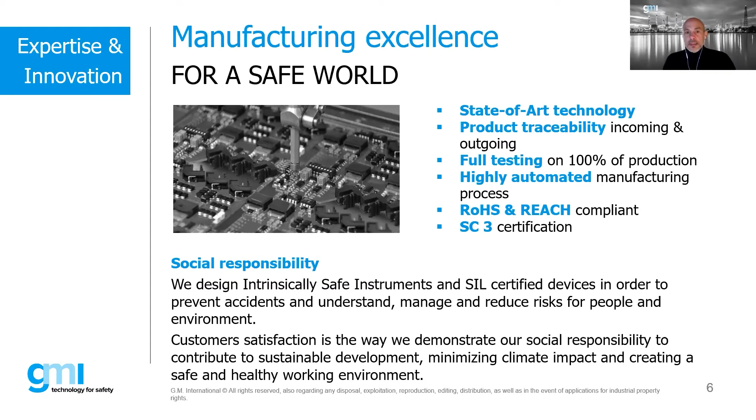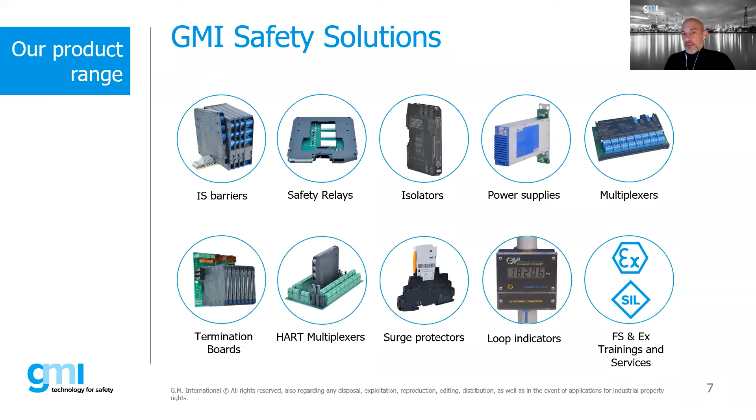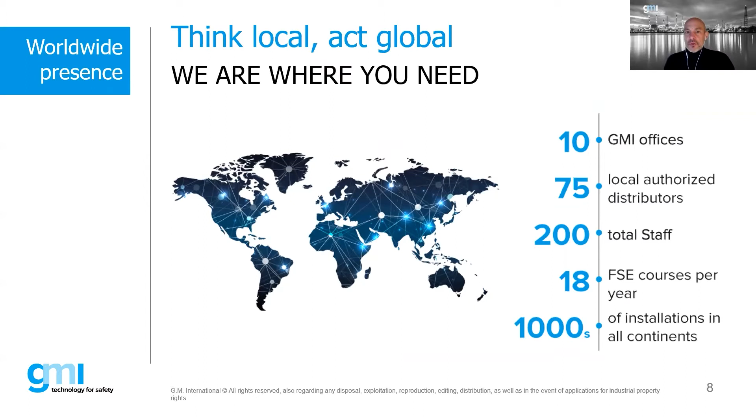So if you are interested in that, just let us know. The presence, some numbers: we have 10 offices, next will also be the 11th in Mexico, we just opened, we are opening. We also have different distributors all over the world, 200 people or less staff, and also some numbers about the functional safety courses and the number of installations.

Okay, we go quickly to the topic of today, and now I'll leave it to Bob. Thank you, Bob. All right.

Well, thank you, Andrea, and thank you very much for joining us. It is midnight here, or a little after midnight in Houston, Texas, so it's been a long day. I apologize if I slur a little bit, but I do have some coffee here to keep me going. So there's a lot of information that I'm going to cover.

And these are the biggest EX mistakes that I see. These aren't necessarily the biggest EX mistakes that you will see, but these are ones that, as an inspector, as a person who does design work in the EX world and sees a lot of EX equipment actually out in the field, these are the kinds of things that I typically find to be issues. So I wanted to bring these to the forefront. Some of these are pretty obvious, some of them maybe not so much. And again, these are only my interpretations of the things that I see.

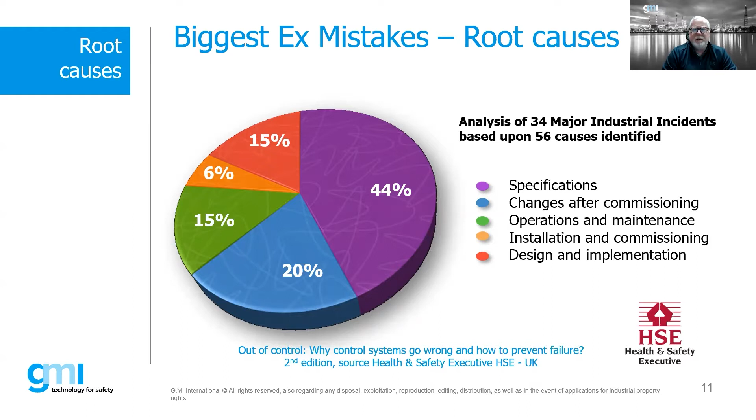So how do we define mistakes, or where can we find the answers, if you will? There's a couple key standards that I find myself using all the time, and you will find variations of these throughout the world. We follow, in effect, the IEC 60079-14 standard, which is our design guide and installation guide, and the -17 standard is our inspection and maintenance of EX equipment. So those two standards are very much where we're going to find a lot of what we need to be doing. These are very handy guides.

In Europe, we follow the EN version of these standards. Here in the United States, we've actually published now a UL version of the -17 standard. And there are variations of these standards that exist throughout the world. For example, in Australia, AS/NZS 60079-14 and -17. In many cases, these standards that are published with variations are all based upon the IEC standard, and they just get tweaked a little bit for the local markets.

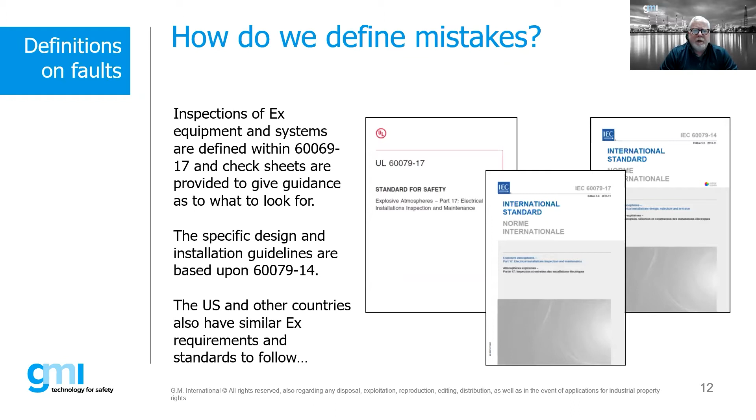So as an example, how do we define some of these mistakes? Well, the inspection tables given throughout the -17 standard give us some specific things to look for when we're actually doing inspections. I know we have a couple inspectors online here, and you guys are probably very familiar with this standard. I always tell people, even as a designer, if you're designing a skid or a system and you're going to have a third-party inspector come into your facility and look at your EX equipment, it's good for the designers and engineers to understand what the inspectors are going to be looking at.

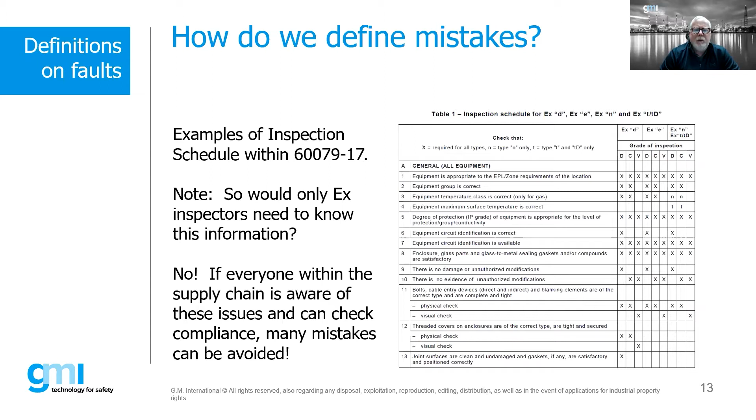So these inspection tables are critical. If you do this, when an inspector such as myself comes into your facility and starts looking at things, you'll know exactly what I'm going to be looking for. So it's important that not only inspectors should be aware of this, but really everyone within the supply chain should be familiar with these inspection tables and inspection charts.

So what's the most common mistake? This is somewhat of a generalization, and many times you think, wait a minute, this is so silly, this shouldn't happen, but it happens all the time. The equipment isn't suitable for the gas group, the temperature code, the zone, the ambient temperature, IP ratings, certification, or environmental conditions. All of these are critical things to understand before we're actually doing inspections, or making sure that whatever those client specifications are, we're selecting the appropriate product based upon the parameters we are given. Or if we're writing those specifications, we need to make sure they include this information, so our subcontractors will comply.

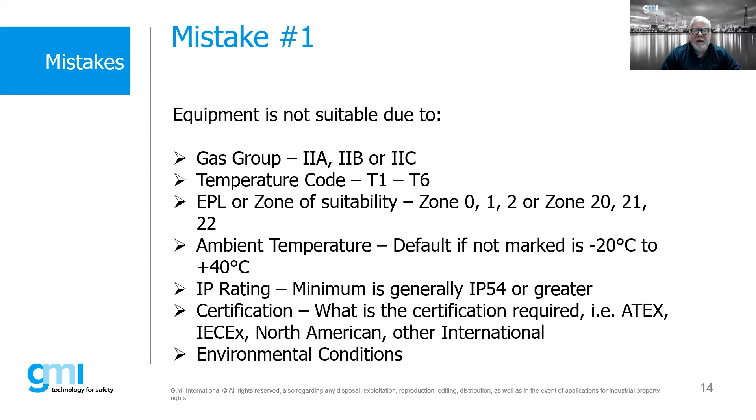It's always horrible when you have to guess and go back and forth without understanding, and maybe some of this information is left off a specification, then you have to go back and try to find out that information later on.

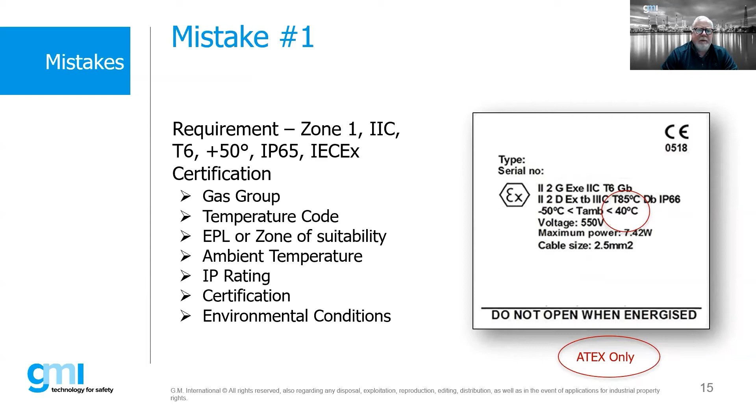Here's an example of a nameplate. The requirement is zone 1, gas group 2C, T6, plus 50 degrees C ambient, IP65, IECEx certification. We've done this in other webinars, but understanding a label is very important. Looking at that label, we can actually see that this particular product is only suitable for plus 40 degrees C. And if you notice, it does not say anything about IECEx certification. What's a giveaway telling us it's ATEX? Normally it would have an ATEX certificate number, but we also find the little EX and the CE mark telling us it's ATEX compliant. So right then and there, we discount this product based upon two factors.

Looking at this particular piece of equipment, again, similar situation. What are some of the issues? Again, ATEX only, suitable for zone 1 based upon the protection concepts, but we have some issues there. The big issue is that this was only ATEX, so therefore it would not be suitable for this particular application.

Here again, zone 1, 2C, T6. Well, there's a couple things on this one, and it spells it out fairly clearly. This product is only suitable for zone 2, and there's a dead giveaway when you see the markings under class and zones where it actually says zone 2. The protection concepts here are telling us it's zone 2 only, and the EPL is telling us GC is zone 2.

And the other thing is that it actually is a component certified product. We see that with a U. That means it's a component certified product, not a final certified product. We'll talk more about that a little bit later on. It also does not have a T code associated with this.

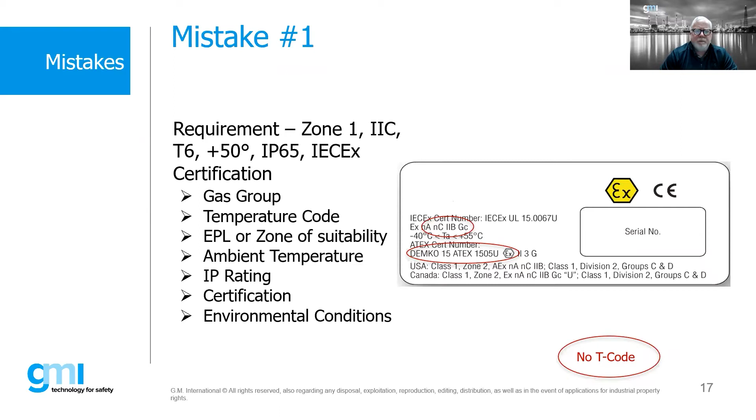Now, here's an example of another product that in this case is actually zone 1, but it's 2B plus H2, not 2C. So it meets all of those other requirements, the plus 50. It has IECEx certification, it is zone 1 rated. However, in this particular instance, it does not meet the gas group, and it does not meet that T6 qualification.

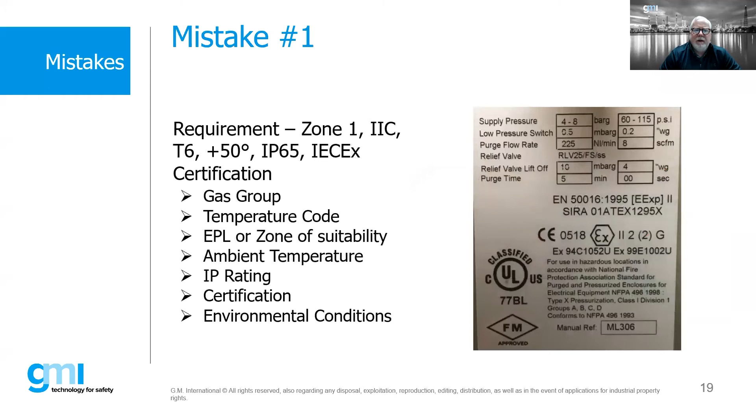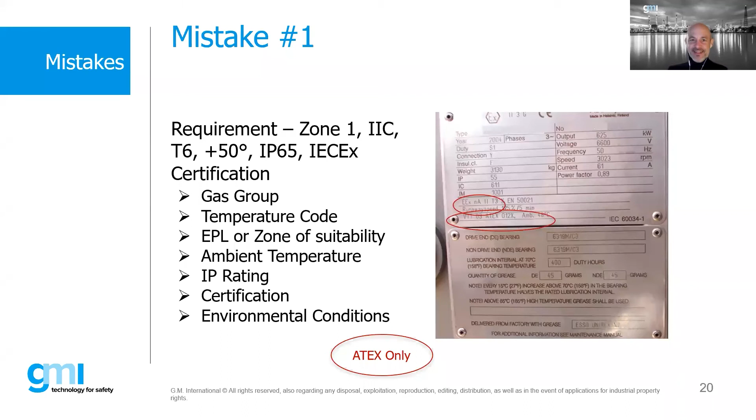I know I'm kind of telling you the same thing over and over again, but this is always a big issue, making sure that these products are suitable for the environments. So I'll skip this one and we'll move on. But here's another example, this one is zone 2 ATEX only, also doesn't meet the IP rating.

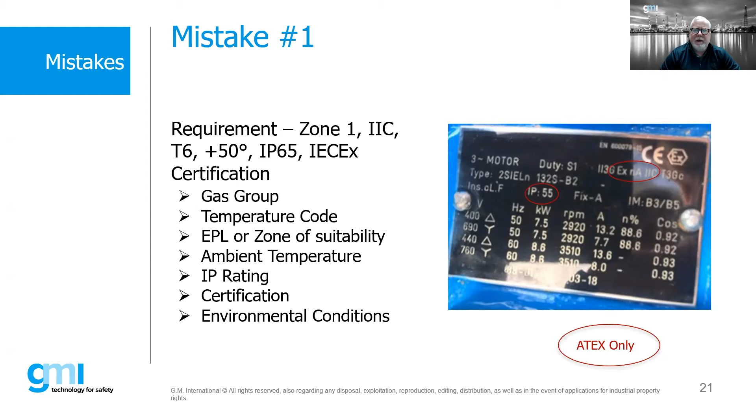So our first poll question: what is the IEC standard that provides guidance for the inspections of EX equipment and installations? So Andrea, do you recall? Yeah, already launched it. Let's see what the reaction is for the attendees.

I mentioned two particular standards at the very beginning, and I see that you're answering both of them. That's good, you guys are paying attention. But there is only one correct answer. All right, we'll give it another few seconds here. Please make your decision and let's stop it. Okay, we're gonna stop it. Now we can share the results.

Okay, yeah, so a majority of you got it right. The 17 is the standard that we follow for inspections. I did not mention what -1 was. -1 is actually the standard for flame-proof equipment, so if we're building a flame-proof box, we're building it to that particular standard. The 14 is the design and installation standard, so 14 and 17 kind of go back to back. We start off with 14, that tells us how to design it, how to install it. 17 is telling us how to inspect it. 10-1 is actually the area classification standard for gases and vapors in hazardous locations. So well done, all right, let's continue on here.

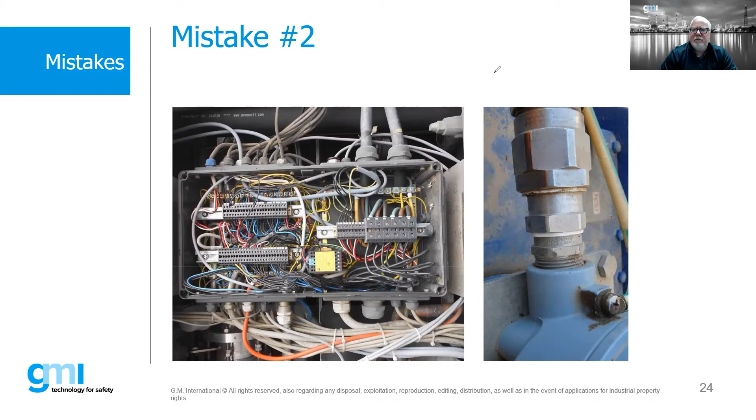On the right-hand side, what we have is a cable gland going into an adapter with an IP washer. And it looks like we've actually got a thread adapter here, and another thread adapter here. So we have two thread adapters, which is not allowed. We don't want to have multiple thread adapters.

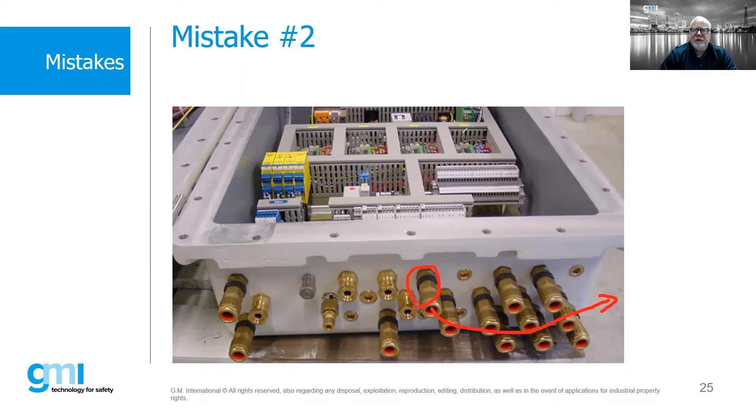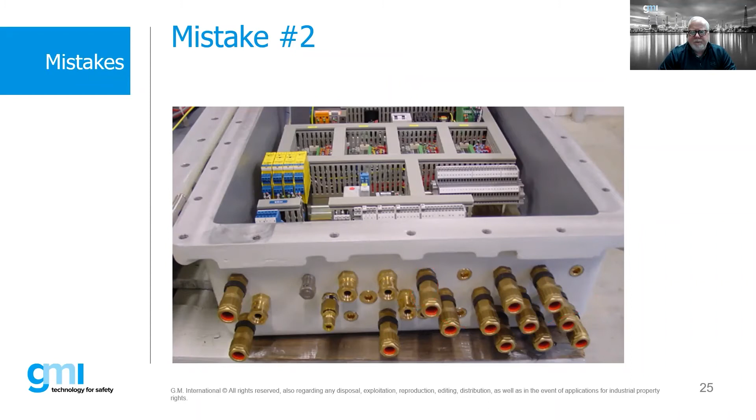If the cable lengths are less than 3 meters, meaning the cable that goes from this cable gland over to a transmitter right over here is only 2 feet away, at this point this would need to be a barrier gland. So we have to understand not only the protection concept of the glands themselves and where they're going, but also where the end device is going to be located. Because if we don't know that, we don't necessarily know whether these glands are suitable. So be aware of that.

There's our example of the Teflon tape on the left-hand side. And on the right-hand side, a combination of certified stopping plugs and non-certified traveling plugs. So the non-certified traveling plugs would definitely be an issue.

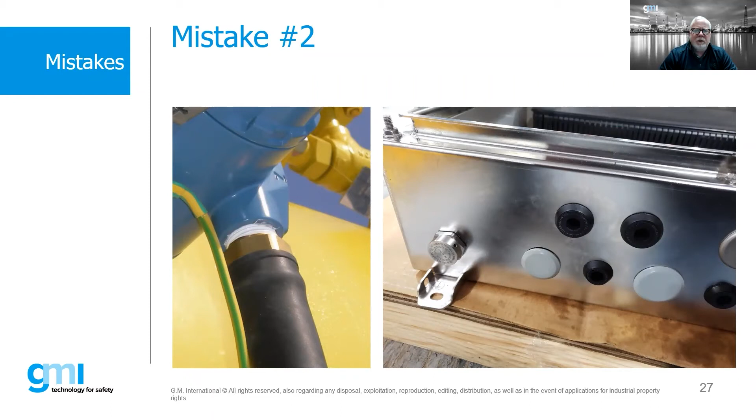So this gets into mistake number 3. Again, on glands, this is always a big issue: non-certified glands, improper installation, not using the appropriate accessories, using EXE accessories into EXD enclosures, failing to take note of

the special conditions for safe use in the installation of cable glands. All cable glands will have an X at the end of their certificate, meaning that they are designed for fixed equipment. Now, some cable glands may actually have in their special conditions for safe use, depending on the cable type, depending on the gland, an additional clamping requirement for somewhere between usually around 300 millimeters at the end of the gland.

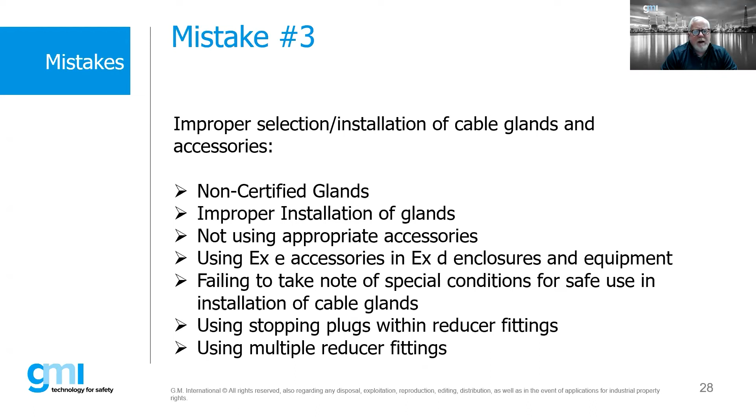If you don't pay attention to the X condition and you start doing an installation of cable glands, and an inspector like me takes a look at it and sees the X condition, they'll say, hey, you need to clamp those cables within 300 millimeters to be in compliance with the certificate. It's important to understand that using stopping plugs within a reducer fitting is not allowed, and then, of course, using multiple reducer fittings.

And then when we start opening up glands, we see that maybe they're not terminated properly, like what you see on the left-hand side. Over on the right-hand side, what you see is actually a plastic traveling plug. That's typically what is supplied by the manufacturer just as a means during the traveling of this product to keep moisture, dust, dirt out. It is not meant to be left in place. It shall be replaced with a certified stopping plug. That's a pretty common thing that we see a lot - traveling plugs left inside of EX equipment.

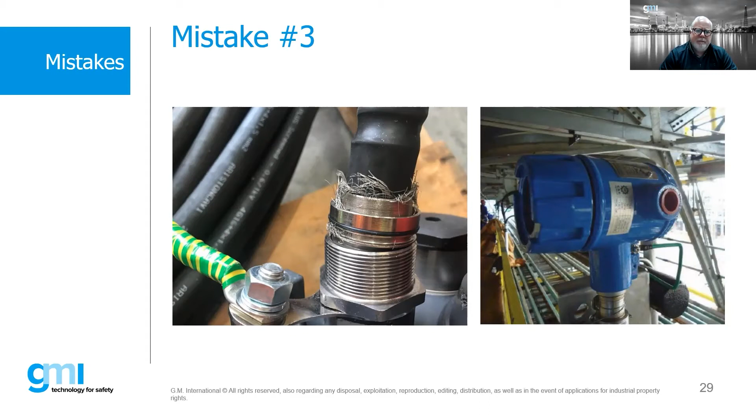Now, this is a little interesting one on the right-hand side. Just by looking at this product, this looks like a flame-proof box, and it is a flame-proof box. On the right-hand side here, what you see is actually a plastic gland. Now, if you know anything about glands, plastic glands are generally never EXD, they are only EXE. However, that box is EXD. By looking at that, you might assume this product cannot be right, that you must replace it with a certified EXD gland. However, if that transmitter was used as intrinsically safe, that may or may not be the case, so you might have to do a little more research.

On the left-hand side, what you see here is a combination of a bunch of accessories - reducers, elbows, adapters, and finally a gland. That generally would not be something that we would want to see. We'd want to minimize the amount of those types of products going into a flame-proof enclosure.

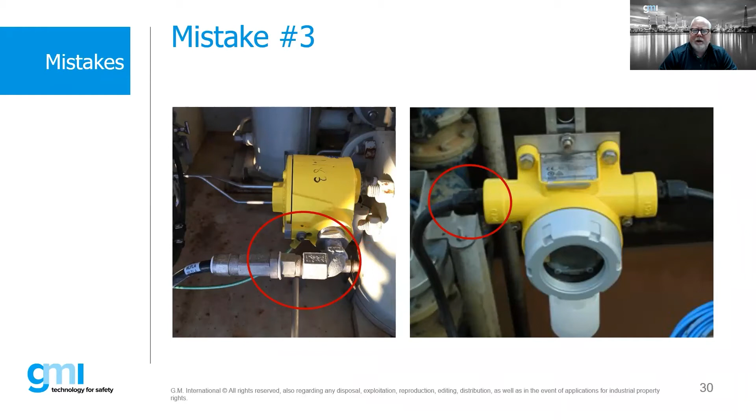Here we see some examples on the left-hand side of non-properly poured seal fittings. Seal fittings or stopper boxes are typically used as opposed to a barrier gland, where they're packed with a compound material. These were obviously not doing any good because these were cables run into entries that were not poured. That's obviously a huge issue. And then on the right-hand side, with the cable not being terminated on the back end of the gland, it pulled out, so therefore now we don't have any environmental protection.

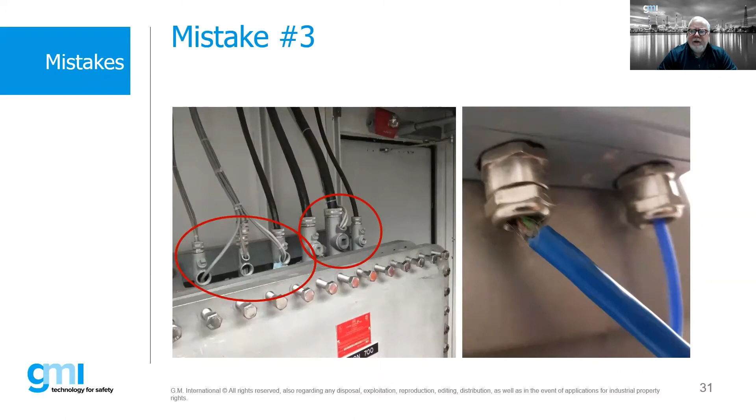Looking at these pictures here, this is where they've actually taken some compound and packed these glands after the fact from the inside of the enclosure. This is not how barrier glands shall be installed.

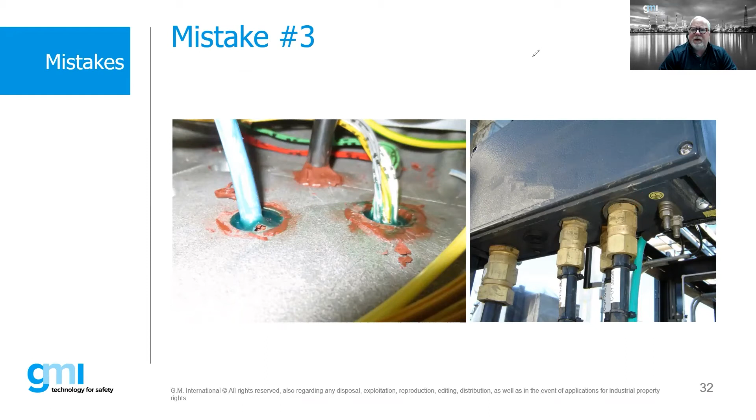What you can see very closely, if you look right here, there's actually an IP washer, but it looks like that IP washer is the wrong size. If you notice, there's a small gap there. So we basically at that point have not got appropriate protection from the gland to the enclosure. Again, that's a minor little thing, but just by looking at it you might glance at it and not see that. But that's an example of something where, if it's a requirement to maintain an IP66 rating in the environment, we've got the wrong IP washer - that's a 20-cent item that we would need to replace. We need to put a new IP washer on there. So those are little things, but those are things that inspectors are going to be looking for.

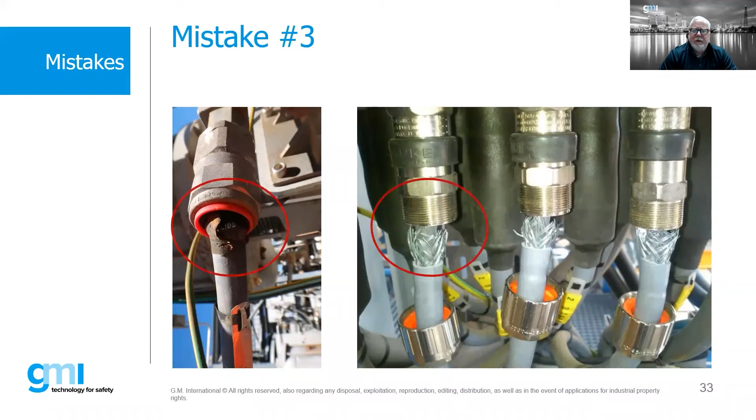And again, these are just other pictures where maybe glands are not properly terminated or they get pulled out for whatever particular reason. So it's imperative that we always look at this. Same thing with these particular glands, same issues.

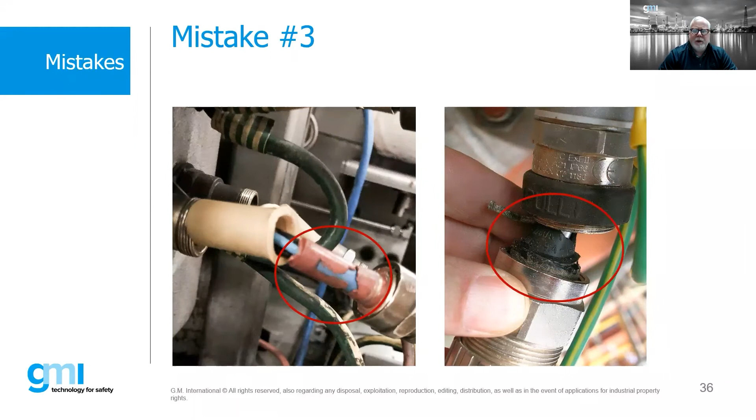Here's another example where, on the left-hand side, we're using barrier glands, but the compound wasn't properly done. On the right-hand side, we have a torn up diaphragm seal. So glands are typically a big issue with regards to inspections, making sure they're done properly.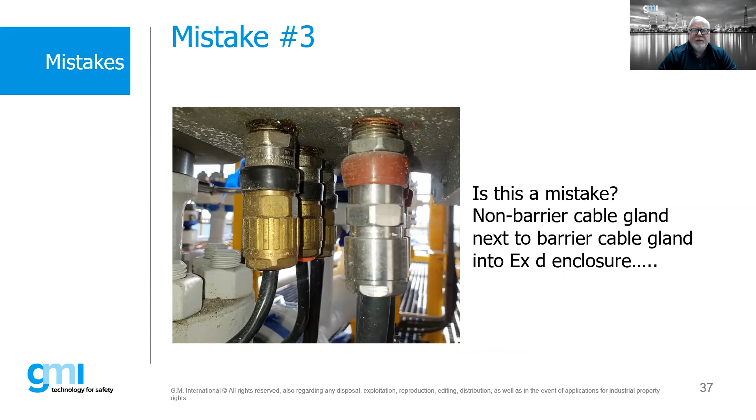That's usually one of the first things I always look at. Now here's an example - is this a mistake? We have a non-barrier gland next to a barrier cable gland into an Ex d box. Actually, this is not a mistake, because the standard does allow the use of a non-barrier gland for cable lengths longer than 3 meters. So the glands on the left-hand side were for cable runs beyond 3 meters, while the cable gland on the right-hand side was to a device about 1 meter away. That's actually a correct installation, even though looking at it, you might think we've got 2 different types of glands going into the same type of enclosure.

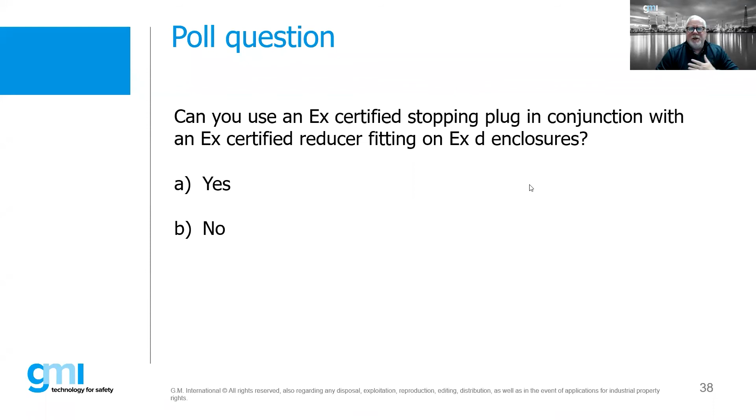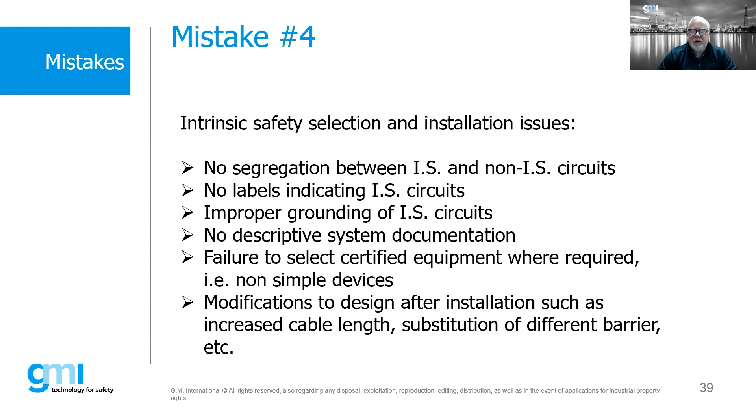These are all issues that we find on intrinsic safety that we have to take into account. Now, some of this could be at the very early design stage, but in many cases this could be after the fact.

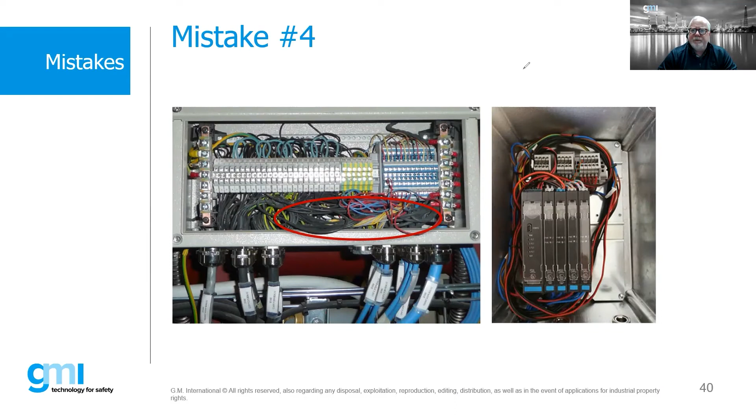What we're seeing on the left-hand side, we have a combination of power and intrinsic safety in the same enclosure, which is allowed, but we've defeated the 50 mil separation when we started looping on the inside of the enclosure. The same holds true on the right-hand side, where we start seeing looping - this is our incoming power, this is our outgoing to our IS, but if we loop this around, we have to maintain a separation of 50 millimeters between the power and IS cables, and we've obviously violated that. That's a major issue with intrinsic safety.

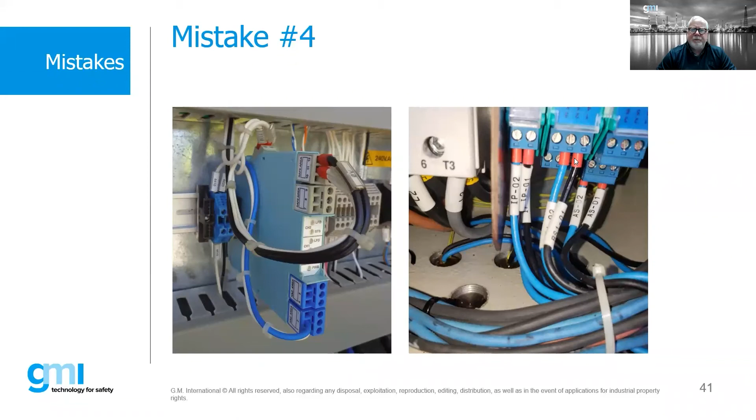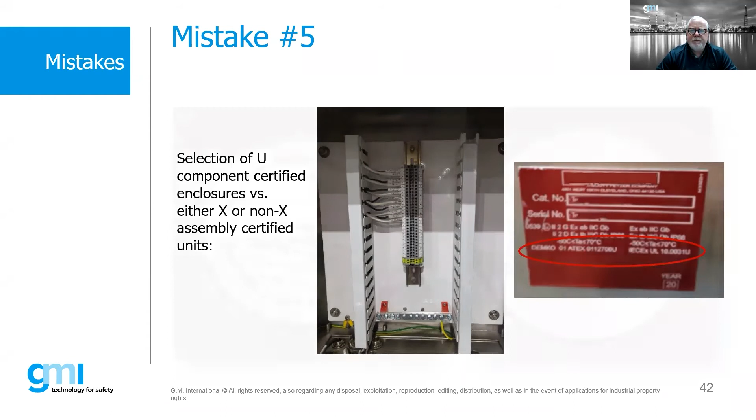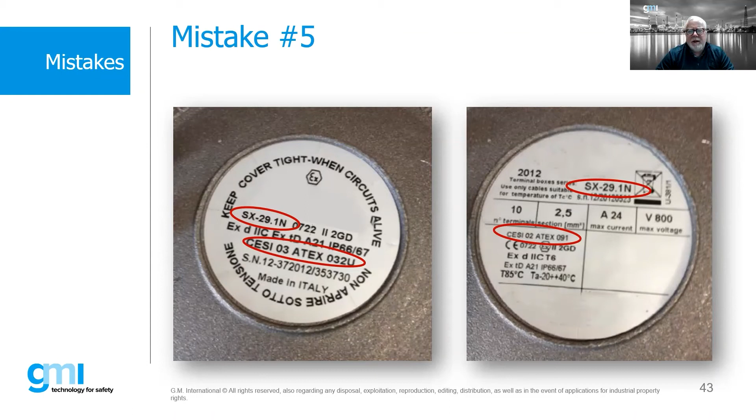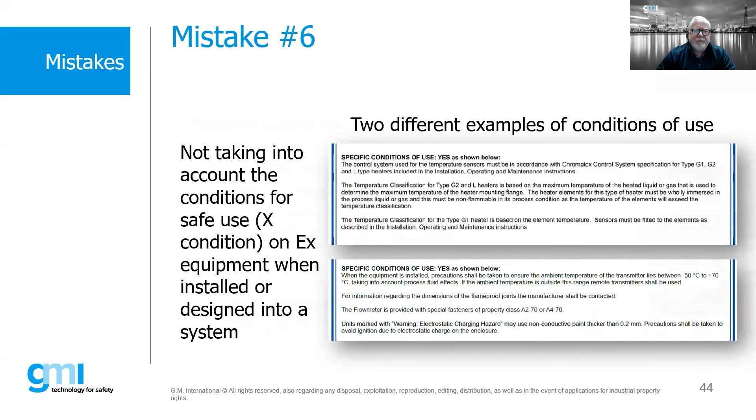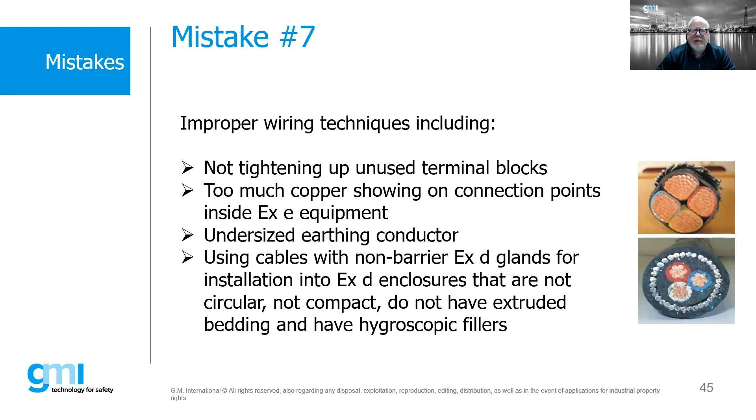Improper wiring techniques: not tightening up unused terminal blocks, too much copper showing on connection points, undersized earthing conductors, using cables with non-barrier EXD glands. Those are all other big mistakes that we see.

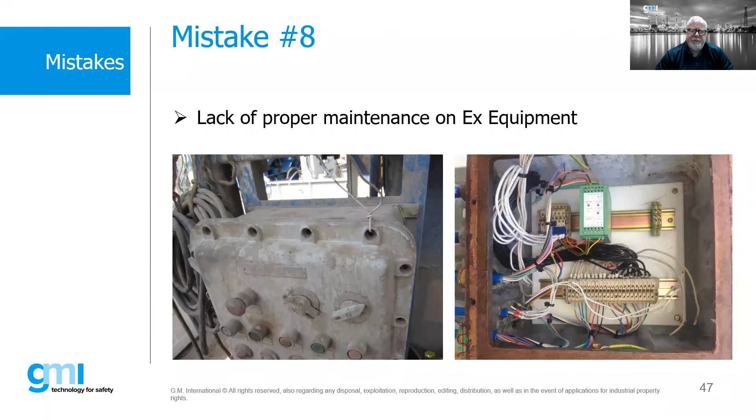Lack of proper maintenance on EX equipment is mistake number 8. On the left-hand side, the bolts are missing and it's just held in place with a piece of wire—not good. On the right-hand side, it looks like we have corrosion issues with the flange. Maintenance on EX equipment is critically important. On the left, we're allowing water to get inside the enclosure, and on the right, we have an issue with the gland and dust and dirt and all kinds of problems.

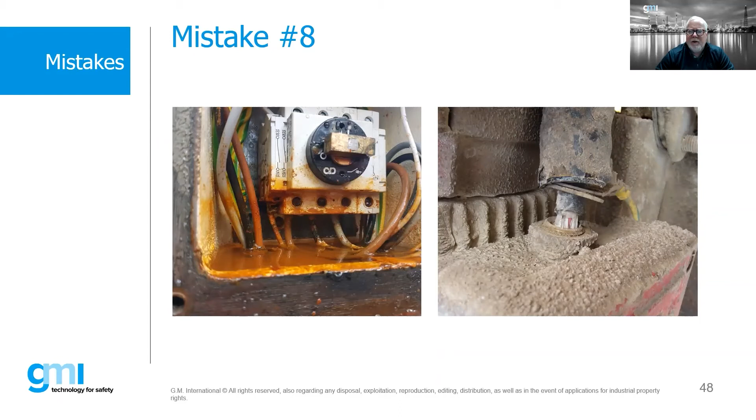Mistake number 9, earthing of intrinsically safe Zener barriers. It's important to note that Zener barriers require a dedicated earth, called a clean earth. In many cases, people will tie the clean earth in with the dirty earth—this is a requirement you cannot do. The resistance for the clean earth needs to be no more than 1 ohm. So it's critically important whenever using Zener barriers that we're using a clean earth. Sometimes, especially when mounting them in a metallic enclosure, the DIN rail is tied into the Zener barrier. If that DIN rail is attached to the metallic enclosure, it's now tied into the dirty earth. So we need to use isolated standoffs or insulators to keep that DIN rail away from the dirty earth.

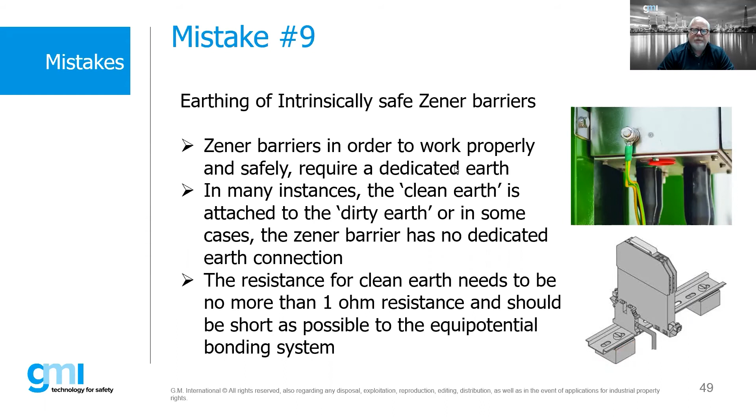I think this is our last poll question, Andrea. Yeah, right, the last poll. Our last poll, I think. Yeah, yeah.

So what letter at the end of the certificate number signifies a component certificate?

Well, so far so good. You guys are getting it. I apologize, I lost my voice here. It's been a long Monday. Was it a long one? I think I swallowed wrong.

So we'll let this go for another few seconds here. I'll tell you right now that most of you got this right, so we'll go ahead and end the poll now and share the result. A majority of you are correct. A component certificate with a U at the end is telling us that it's a component. An X is telling us that it has some sort of condition for safe use. Those are the two letters you will see at the end of the certificate. Realize if it's a U and it's a final product, you need to reject it immediately. If it has an X, we have to do some digging and find the certificate to make sure that product is installed in accordance with whatever the conditions for safe use tell us.

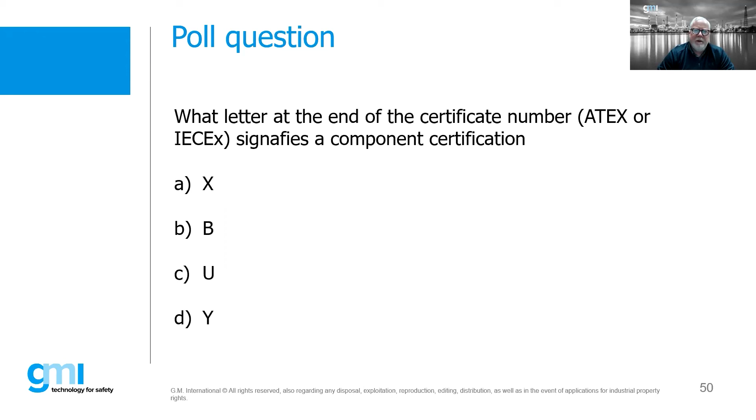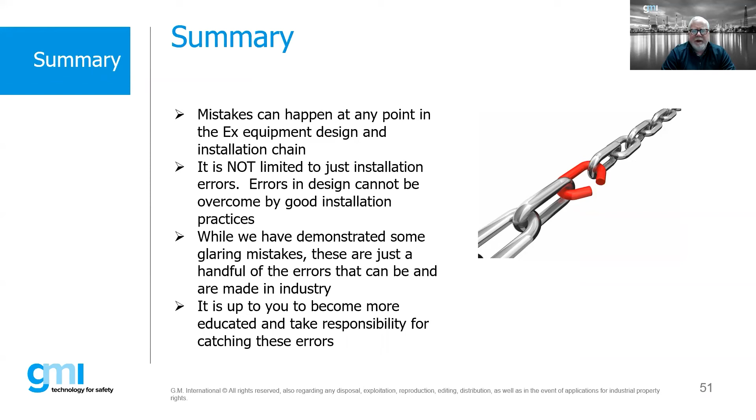So mistakes can happen, right? It's not limited to just installation errors, because errors in design cannot be overcome by good installation practices. I've demonstrated a couple glaring mistakes, but these are just a handful of the errors you can see, and they're made in industry. It's really important, not just for the inspectors but everybody within the chain, to make sure we're catching all of these mistakes at the very early stages. It's good business to make sure we don't spend time reworking things, but this is a safety critical industry. When we have errors, this is where we have disasters, and we don't want to be the one who's responsible for not catching an error that ultimately could result in the loss of life. So that's critically important.

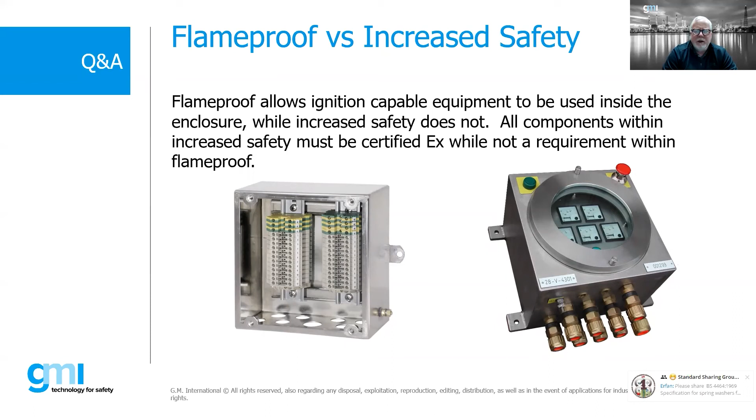Difference between flame-proof EXd and increased safety EXe for power applications - what's the big difference? Flame-proof on the right-hand side is a good example of a flame-proof enclosure. Flame-proof enclosures will allow ignition-capable equipment to be used inside the enclosure, while increased safety does not. On the left-hand side, that's an increased safety enclosure with increased safety terminal blocks, and those terminal blocks have certain creepage and clearance requirements, and that's not considered to be arcing and sparking if they're installed correctly. So on the left-hand side, perfectly suitable for zone 1, just like what you see on the right-hand side. However, the components you're putting inside an increased safety enclosure all must be certified. The products you're putting inside a flame-proof box do not require any EX certification. So if you have an application with high energy arcing and sparking devices like contactors, relays, things that don't have an EX certification in and of themselves, in many cases flame-proof is certainly a viable solution. There are other protection concepts like pressurization that can be used, but certainly flame-proof is one.

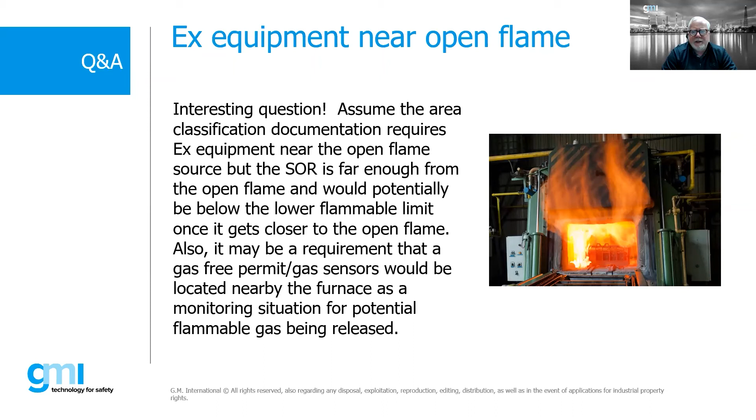This was an interesting one: why must we use EX equipment near industrial furnaces which have a source of an open flame? If you have an open flame, there's fuel, there's ignition sources - are we expecting to have a flammable gas air atmosphere in that environment? Probably not, we should hopefully have that flame burning it off. However, there are some instances I've seen where, if we have a fault condition and maybe the furnace has been extinguished, but yet we have a release of gases used to fire the furnace - maybe it's a gas-fired furnace - then we have a release of gas. So you would have an application where you might need EX equipment, possibly zone 2 EX equipment located near a furnace. It wouldn't necessarily be during operation when the furnace is operational, but it would be there in case of an unintended release of flammable gases used to feed the furnace.

So there was a question on the UK certification scheme, and this is becoming a big topic if you're in the UK. With the UK pulling out of the EU under Brexit, the UK government has come up with new UKEX regulations. These will go into effect January 1st of 2023, about 11 months from now. They postponed it one year, it was supposed to go into effect this year.

These will replace the ATEX requirements within the UK. They still will require testing for Zone 0 and Zone 1 equipment by a UKCA government-approved body, similar to notified bodies, but generally UK certified bodies. Instead of referencing the EU directives, you would now need to reference the UK legislation. So instead of ATEX Directive 2014-34 EU, products must meet the UK equipment and protective systems intended for use in potentially explosive atmosphere regulations from 2016.

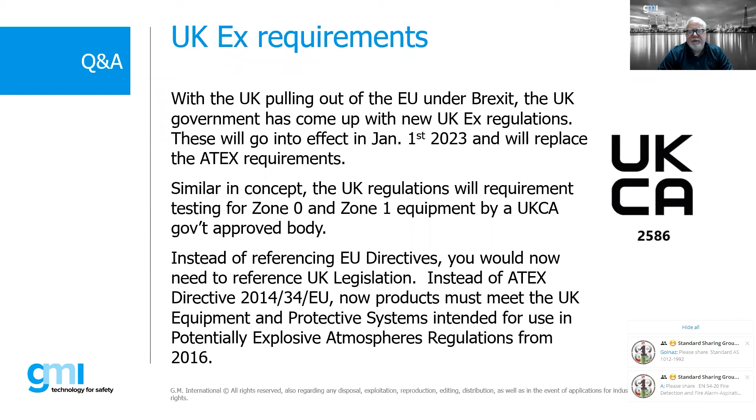So from a pure product standpoint, the standards are more or less the same. It's just an additional step that you're going to need to take in order to get your product certified for use in the UK. It doesn't mean the products are really changing, it's just additional markings and an additional step for the manufacturer to get their certification done.

When selecting EX equipment, where should I find the relevant information as to the installation instructions? Certainly the manufacturer's data sheets along with the installation documentation is important. It's always advisable to obtain copies of EX certificates from the manufacturer before selecting the equipment and to read fully the scope of the certificate along with any conditions for safe use required for a safe installation and operation.

I tell designers and engineers all the time - we sell product, we're a distributor for GMI - don't buy any product until you've had an opportunity to look at the certificates. Manufacturers will put out beautiful information telling you it does all this great and wonderful stuff, and they do, but the devil is in the details. We want to get copies of the certs so we understand any pitfalls, any limitations, anything about that particular product we need to be aware of from an EX perspective. Get a copy of them before you actually start buying products - it will save you some heartache and headache down the road.

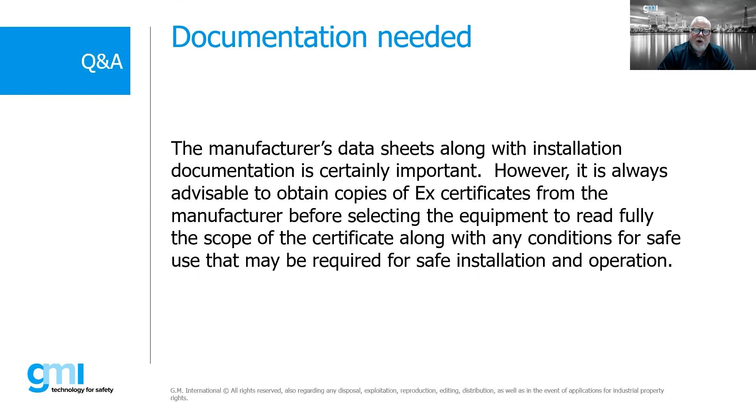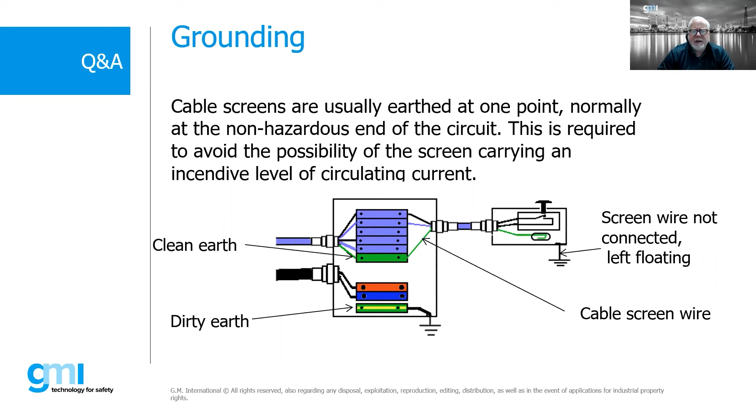How to properly ground the wire screens - this was on an IS question. This little drawing shows the cable screens are usually earthed at one point, normally at the non-hazardous end of the circuit. This is required to avoid the possibility of the screen carrying an incendive level of circulating current. We have a dirty earth going to ground, a clean earth, and our cable screen wire coming through our clean earth terminal. The screens continue on to the next cable, and the screen wire is not connected and left floating. Any stray currents would flow back into the safe area or non-hazardous area. That's how we want to treat our screens.

Let's see if I can read this. What precautions should be taken during maintenance of such equipment and systems, including planning and steps before and afterwards?

Details on maintenance of EX equipment are defined under the -17 standard. The types of inspection - when a product is brought into service, it is always a detailed inspection. Then management will make determinations as to the inspection schedules after that: periodic, sample, or continuous supervision. What grades of inspections - visual, close, or detailed, or a combination? How frequently? We document our lockout tagout procedures, and we need to document the competency of the personnel responsible for doing those inspections. These are all the things spelled out within the -17 standard.

So when we have students go through the IECEx CoPC program, this is a big portion of what we cover in detail.

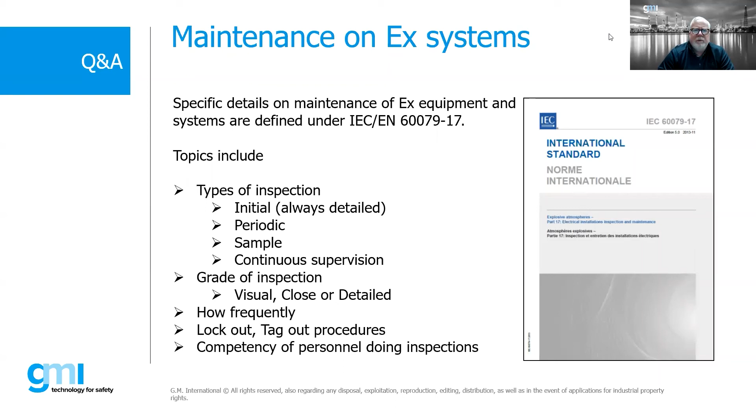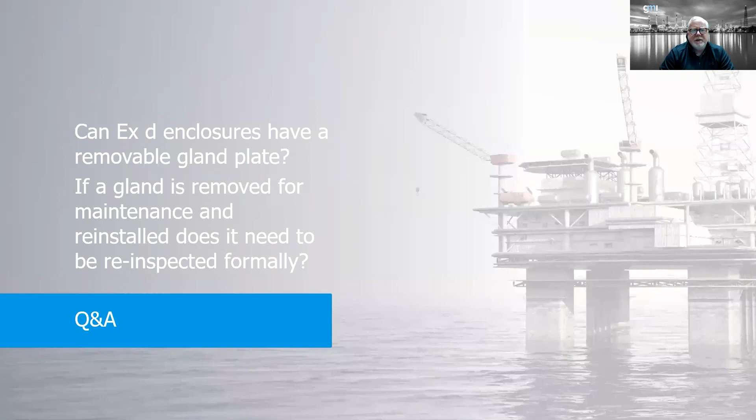Can EXD enclosures have removable gland plates? If a gland plate is removed for maintenance and reinstalled, does it need to be re-inspected formally? So EXD enclosures do not have removable gland plates because they are typically a fully sand or pressure cast enclosure. However, EXE enclosures do and can have removable gland plates.

Generally speaking, if a gland plate is being replaced, or a new one is being installed, a full detailed inspection of the gland plate should take place. By the way, gland plates are not a requirement. They're a good idea, however.

The reason manufacturers typically have gland plates is that, as I mentioned earlier, you can actually punch holes or drill into EXE boxes. If you screw up on a gland plate, you don't have to worry about replacing an entire box. You just need to replace the gland plate. That's a big issue. Secondly, it's much easier, especially with larger cabinets, to do drilling on a plate as opposed to a large enclosure.

After initial installation and commissioning of an IS system, what is the recommended periodicity to validate the system? What is the procedure to check an IS loop without disturbing or shutting down the process?

The IEC 60079-17 standards mandate that every piece of equipment shall be inspected at least every 3 years. Now, that doesn't mean we have to de-energize every piece of equipment and do a full detailed inspection. That just means we need to, at least within 3 years, take a look at it. If nothing has really changed in the environment, no serious corrosion or anything like that, then we can validate it in that way.

An IS system loop can be verified under live conditions because it's inherently safe. For example, HART signals can be sent to a transmitter to force signals to any level without affecting the safety of the loop. So we do want to be very, very careful, however, when we're doing testing on IS circuits in the field.

We need to make sure, number one, the equipment we bring into the field—if we bring a standard meter into a hazardous location, that meter itself could be a potential source of ignition. So either we have to have a gas-free permit, or we have to make sure that device is suitable to be brought into a hazardous location.

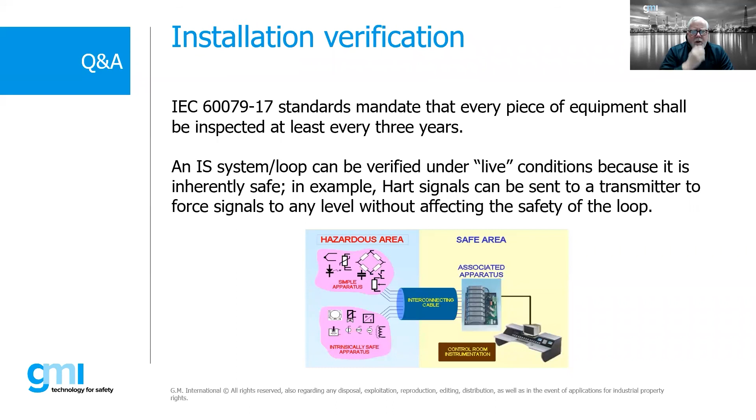Can I install an IS barrier in the field in a remote area? Generally, intrinsically safe barriers are certified for zone or division 2, as long as the enclosure is suitable for the environment, if you will.

However, they can be installed in a zone div 1 as long as they're being provided some sort of suitable protection—could be a flame-proof enclosure, could be a pressurized enclosure. Those would be two examples of installing ISBs in a hazardous location that is zone 1.

We had a situation here not too long ago where a customer had an issue where the length of cable had to be very, very short based upon the ignition curves of the particular application. The cable length actually had to be a couple hundred meters long. Well, the control room where the barriers were going to be located was going to be beyond that distance, and that was going to exceed the capacitance and inductance ratings for the cables.

So what we recommended in that instance was to take those barriers and actually install them in a flame-proof enclosure, locating them much closer to the end devices, so we could stay below the inductance and capacitance built up from the cable. So there are different ways to address these situations, how you may need to install ISBs to make them safe.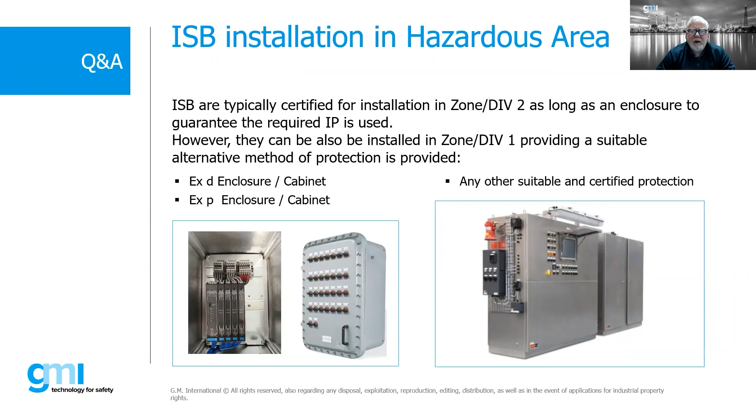Is it possible to install a non-certified simple element like a push button using an IS barrier? Yes, it can be done as long as it's defined as a simple apparatus. So what is a simple apparatus? It could be a thing like a junction box, resistor, simple semiconductor devices, but basically sources of generated energy such as thermocouples and photocells, which do not generate more than 1.5 volts, 100 milliamps, and 25 milliwatts.

So Bob, can an RTD or thermocouple be defined as a simple device? Yes, it does not need to be certified. Just an IS barrier would be enough for having the certification for the system. Yeah, right—it does not require a certified device.

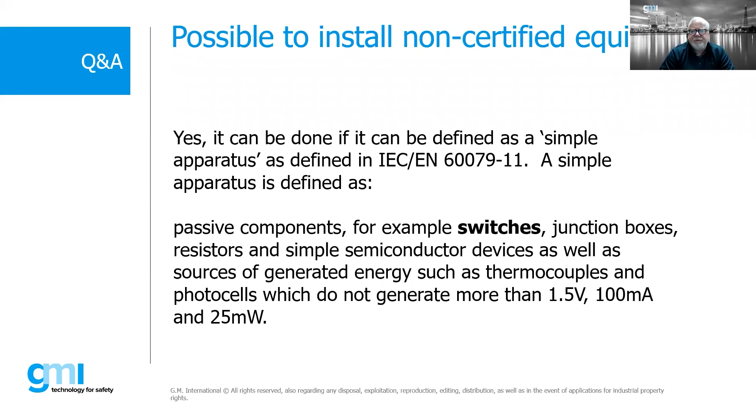So now you'll find certified thermocouples, because some people won't use them in conjunction with IS. They might use them as flame-proof instead, so you can find Ex d thermocouples. The difference is the housing would be the same, but the glanding and the cabling would be different for that application.

Which is the hazardous area protection method most used? This is a great question, but it really just depends. For power applications, a lot of flame-proof is used. Here in the United States, we use a lot of what is called explosion-proof, which is basically the US version of flame-proof. However, intrinsic safety is very common in other parts of the world, and we certainly use intrinsically safe methods here too. High power devices really can't be made IS - they are typically Ex d. When large instrumentation panels need to be installed in a hazardous location, air purging is a lower cost solution. For zone 0, we're basically limited to intrinsic safety or encapsulation, and sometimes we'll find large high voltage devices such as transformers could actually be oil-immersed Ex o. So there's not necessarily one protection concept that is best for everything - in some cases we'll combine those protection concepts in one particular product as the best solution.

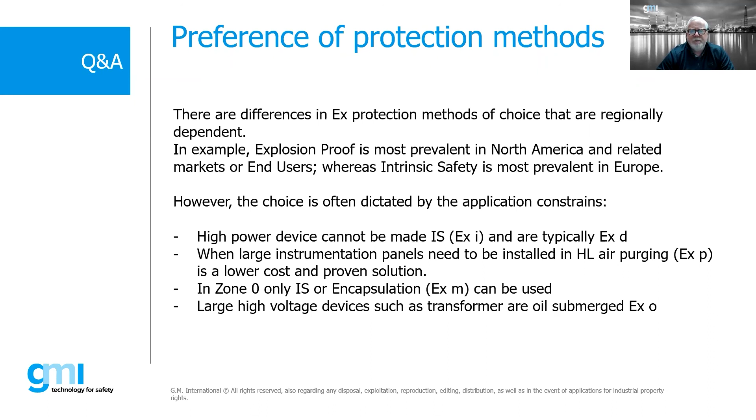I think we're running out of time here, but yeah, there we go. I think we're done. So... yeah, there is a question.

What is the difference between flame-proof and explosion-proof enclosure? Yeah, and that's a good question.

Flame-proof and explosion-proof operate in the same fashion - they are designed to withstand an internal explosion. However, the big difference is, if you look at them, they look very similar: they have bolts, they're cast metal. The requirement to meet the explosion-proof requirements under the UL standards is that these enclosures must withstand 4 times reference pressure, meaning that if, say, that box is suitable for hydrogen applications, and hydrogen, when it explodes, the pressure might be, let's say, 50 psi, then in order for an explosion-proof box to be suitable for that application, it must withstand 200 psi. On the other hand, a flame-proof box only requires a 1.5 times pressure test rating. So typically a flame-proof box will have slightly thinner walls, the flanges won't be quite as large, you might have fewer bolts, but they're very similar in design - they operate on the same principle. It's just that explosion-proof boxes are much heavier, much more robust, and must withstand a higher pressure. That's basically it.